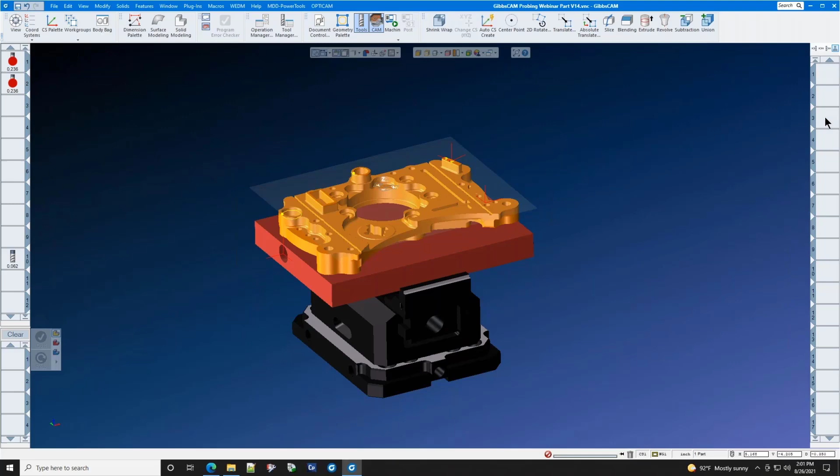In the previous webinar, we talked about why we probe. Today, we're going to get a little bit more in depth about how to probe.

In this webinar, we will highlight datum setting just prior to machining, in other words, using your probe as an automatic edge finder.

We will also talk about measuring your part and viewing the measurements in your machine, called critical part feature analysis. The data flows into a table on your machine where you can actually view the dimensions of your part.

We will show you how to update wear compensation values and work offsets to get your part to tighter tolerances, and with a little bit of macro work, you can create an inspection report after the completion of machining.

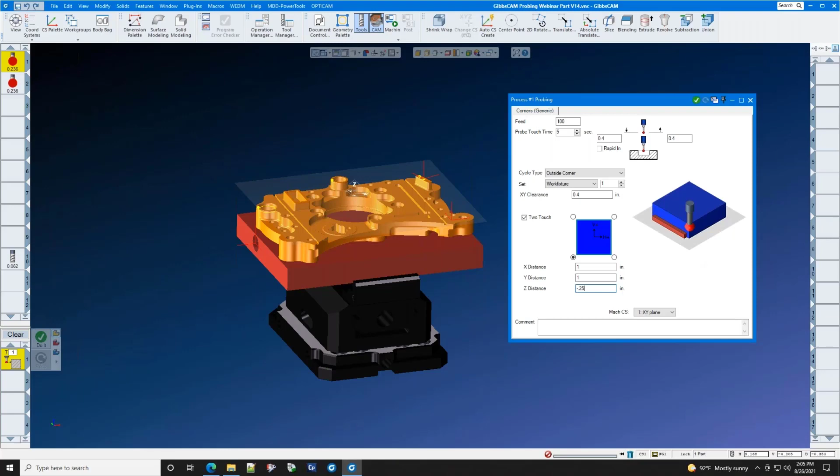Let's switch over to the GibbsCAM screen. I have a bunch of probing operations here, and we're going to clear them all out, and show you how we put a probing operation on a piece of stock.

Here we have a 5-axis vertical. Let's have a look at the machine real quick so we'll know what we're looking at. It is a Doosan DVF 5000.

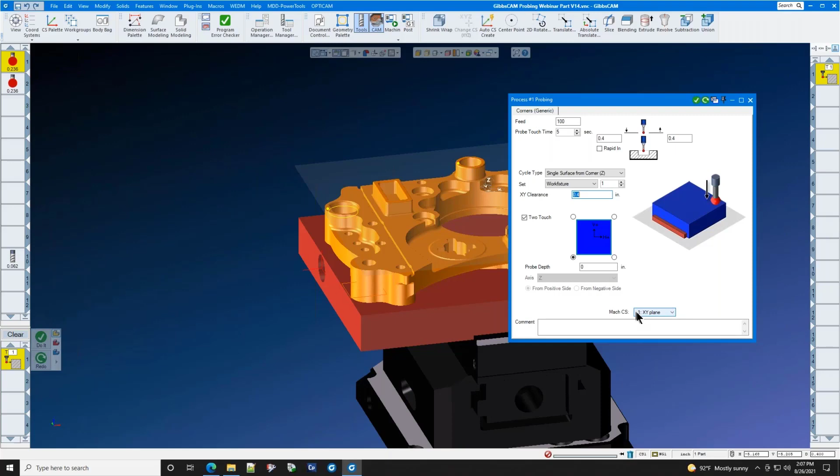There's the machine, the part sitting on the 5-axis table, and we will do some multi-axis probing today. But let's look at the part and the fixture, and we've already seen the stock.

We're going to show you how to probe the corners of the stock using your Renishaw probe and the Renishaw Inspection Plus software that's already embedded inside of your machine.

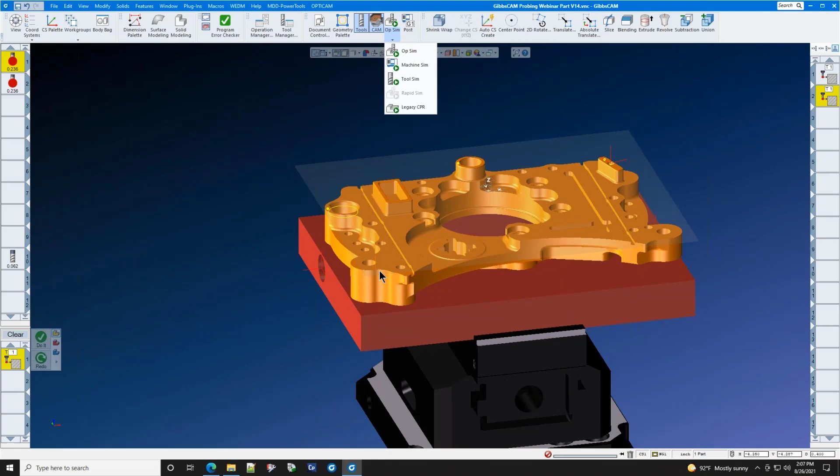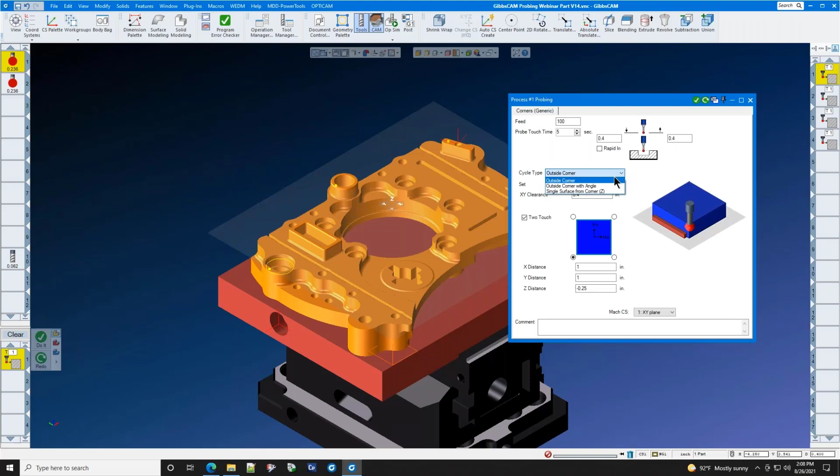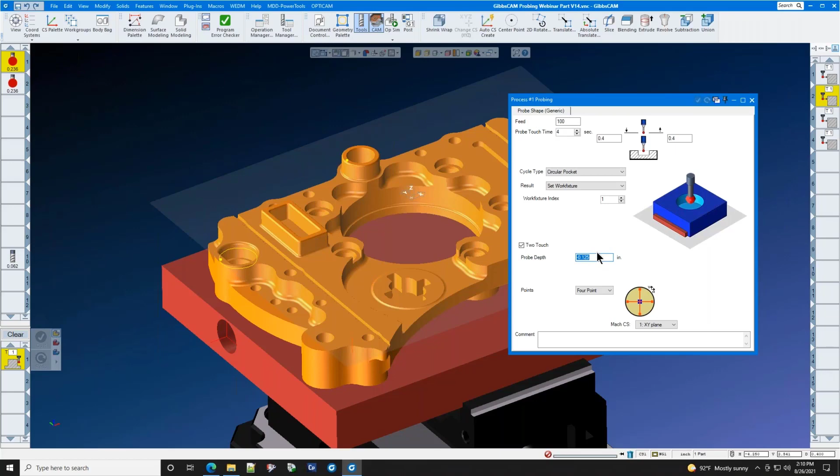We're going to clear the part by 0.4, and once we get inside of 0.4, we will go at a slower feed rate. Renishaw does that automatically. We're going to measure an outside corner, and we're going to set work fixture 1.

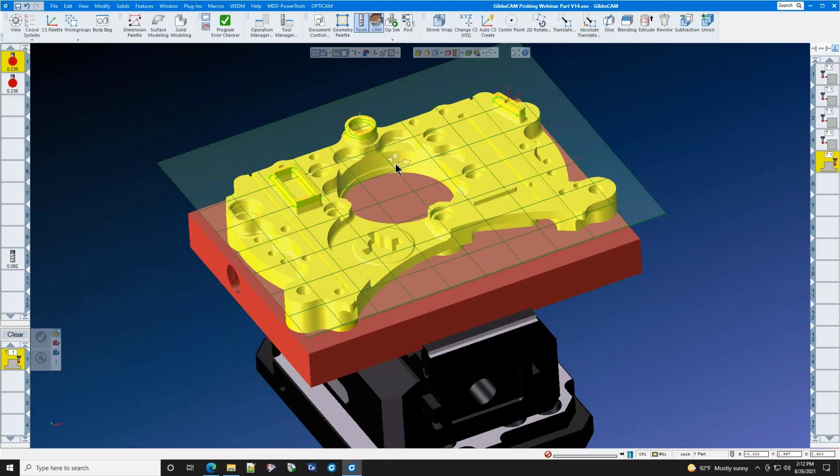Our XY clearance is 0.4, which is a short way of saying 10 millimeters. In your Renishaw Inspection Plus software, 10 millimeters is the standard offset distance.

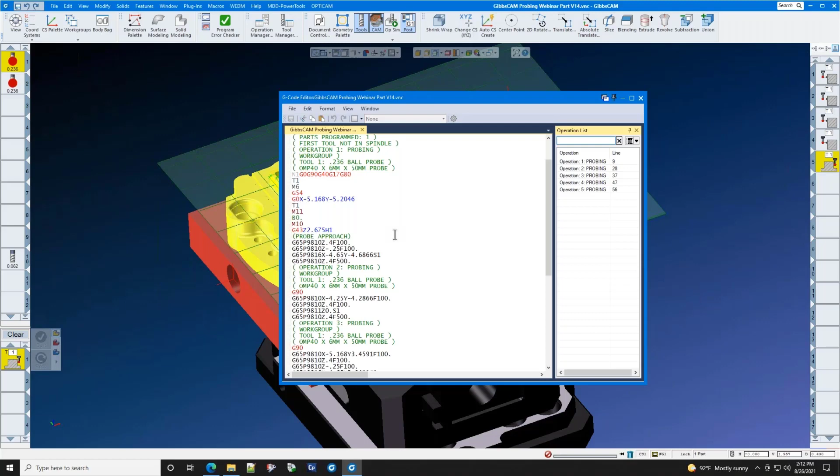I want to probe the lower left-hand corner with 2 touches. This 2-touch doesn't change what happens in your machine, but it does show a single touch or a 2-touch cycle here in GibbsCAM if you want to save time with single touch.

How far from the corner do I want to measure? My X distance of 1 and Y distance of 1. I will measure 1 inch up and 1 inch over.

And my Z distance is to the center of the ball. I'm going to make this minus 250 because the ball is 236, and I want to make sure that the ball gets below the outside of the stock.

When we click Do It, we get our first probing cycle. Let's look at it in Machine Sim and see what it looks like on the machine. Seeing it before you machine it is always the best way to review your CNC process.

We measured X and Y, and set X and Y in this coordinate system to that corner. Now we need to do the Z as well. Change from outside corner to single surface from corner Z.

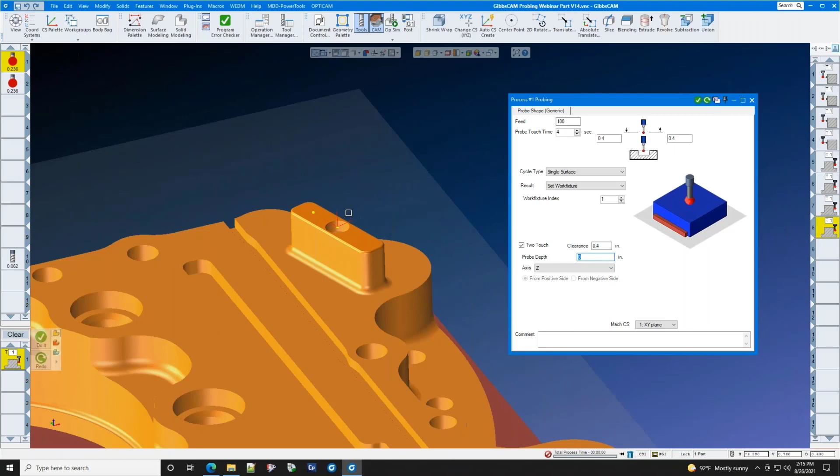The top of the stock is at 0. It's already been precision faced off, so we're going to set the probe depth at 0. When the probe touches the top of the stock, we want it to be set to 0.

This is a single surface corner, XY clearance 0.4, 2-touch, lower left corner, Z axis, and always from the positive side. It would be kind of difficult to probe this from the negative side. And of course, we're in the XY plane.

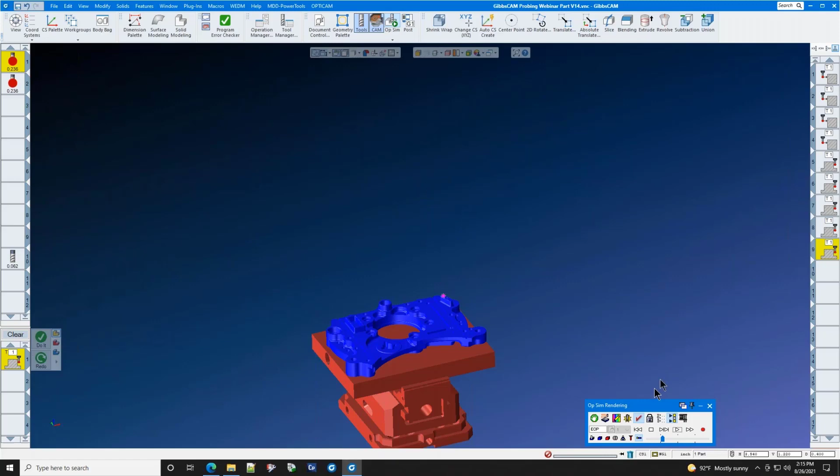When we click Do It, we now have 2 probing cycles. Let's watch both of them run, then change that to OpSim and rewind. You will see corner 2-touch, corner 2-touch, and top. We just set that corner to these coordinates.

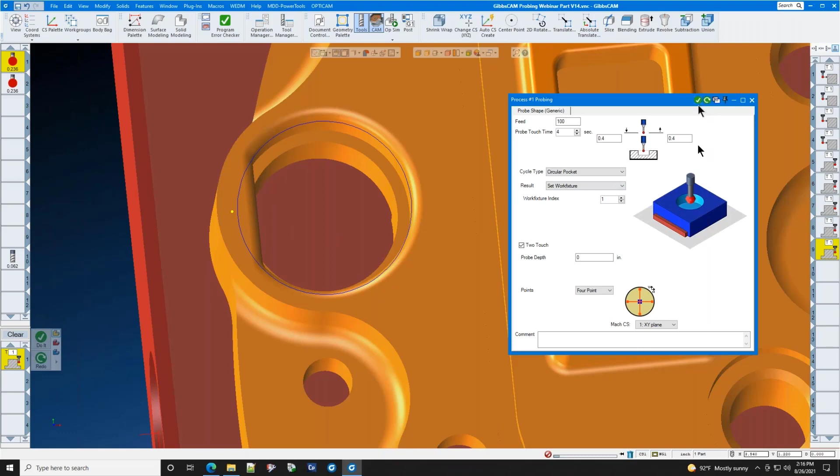You don't have to set your corner to 0. GibbsCAM and the Renishaw probe know that 0 is going to be over here, the distance from this corner. You can see the distance: X is minus 4.65 and Y is minus 4.6866. So don't worry about that—GibbsCAM and Renishaw will set your coordinate correctly.

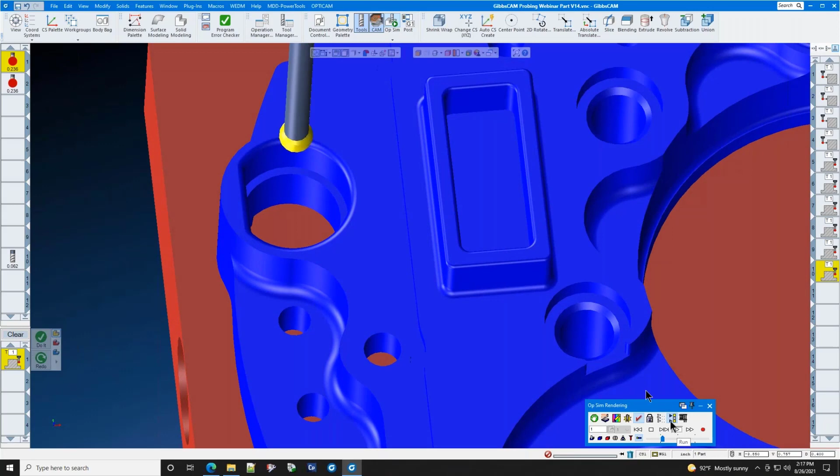You can duplicate this for each additional corner simply by opening the first op, changing to the upper left corner, and clicking Do It. You've got a probing cycle. Double click Op 2, change to the upper right corner, click Do It. You can do that all the way around the outside of the stock with very little effort.

The probe is a very accurate measuring device that most people only use as an edge finder. Here, we are teaching you how to use it as an edge finder. A little bit later in the webinar, we'll talk about measuring your parts and even updating the wear comp on your tools. Here, we're talking first about datum setting.

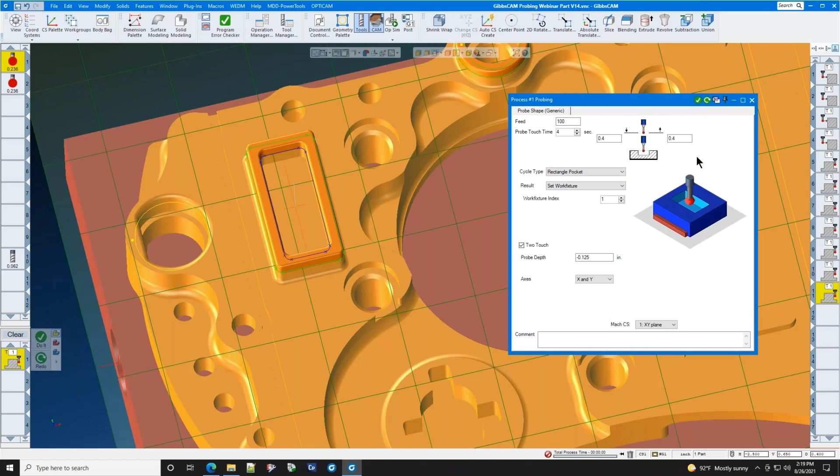Let's review: datum setting is with work fixture or work plane. We're using work fixture, and we're doing corners right now. We did the outside corner and we did the Z.

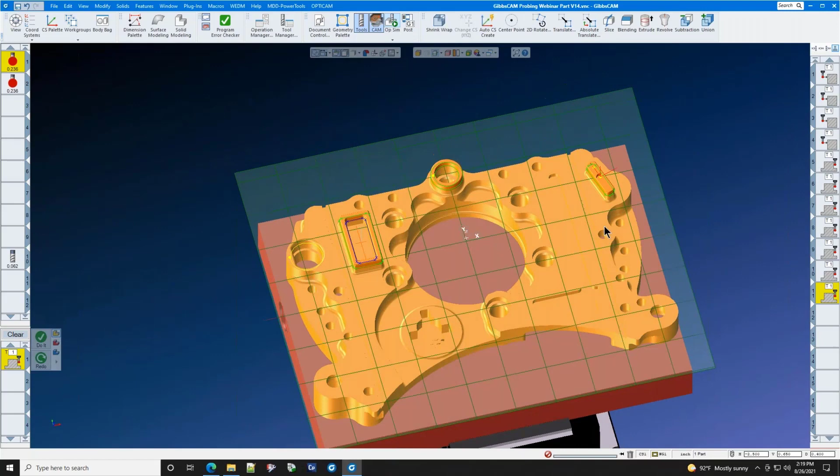Once you automate this, every time your operator puts a new part in the machine and closes the door, you have created a predictable, automated process that does not make mistakes.

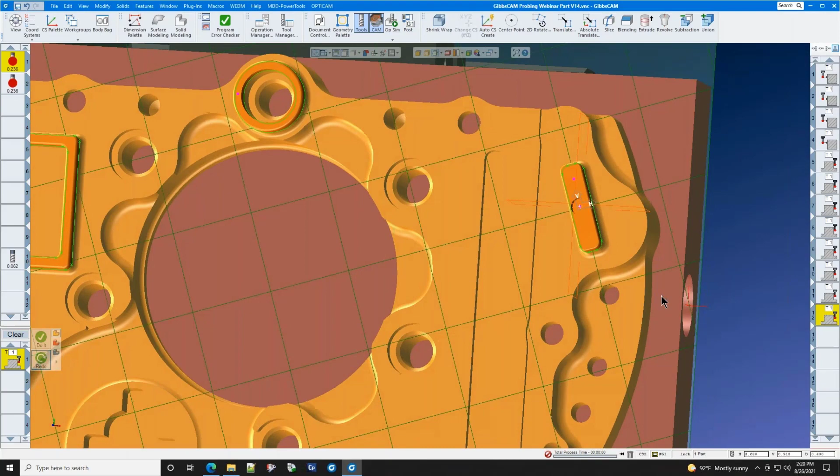Your probe's accuracy is 40 millionths of an inch if you have the standard probe. If you purchased the improved accuracy probe, which is a CMM quality probe, your accuracy is 10 millionths of an inch. So the probe is much more accurate than your machine.

Let's move ahead a little bit and talk about probing other types of features. Remember, this webinar leans more towards how do I probe rather than why do I probe. The first thing I'd like to look at is let's measure this bore and this boss right here.

And we're going to use that feature to set our 0. Bring the probe down. Select—now, instead of corners, we will select shapes.

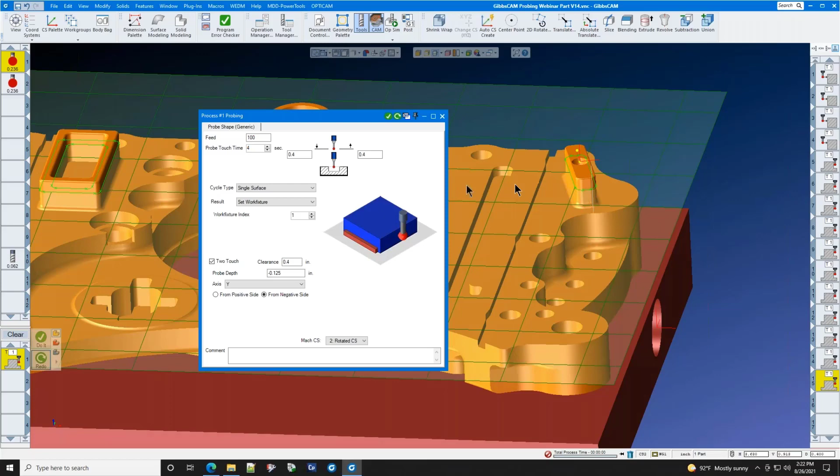We will set our feed rate at whatever your machine can tolerate or whatever your machine is programmed at from Renishaw. I'll put 4 seconds in here for cycle time, the standard Renishaw standoff distance of 0.4 and 0.4. And let's do circular pocket first.

Do we want to set work fixture or measure? We want to set work fixture, and let's set work fixture 1. 2-touch. Probe depth—I want it to go just inside of this bore. 0.118 would be the center of the ball, so we set minus 0.125, and this will be a 4-point measure.

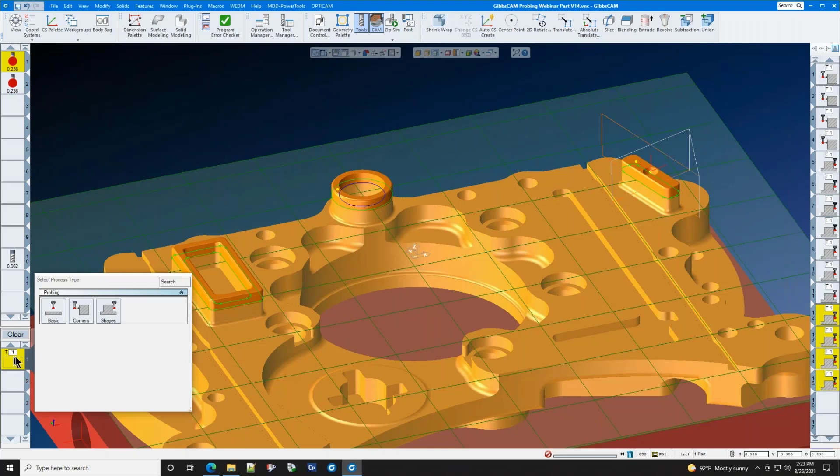Turn on your profiler because you do not need to extract or create any geometry, and click the Do It button. We now have a probing cycle inside of that bore with just a few clicks. Let's have a look at that cycle by itself, but first we need to set the part to stock. Click on the part, right click, body type is stock.

Now when we go back to OpSim and press rewind, we will see the part. Let's select here, skip unselected ops, that way we don't have to watch the corners. Let's probe the bore: 1, 2, 3, 4.

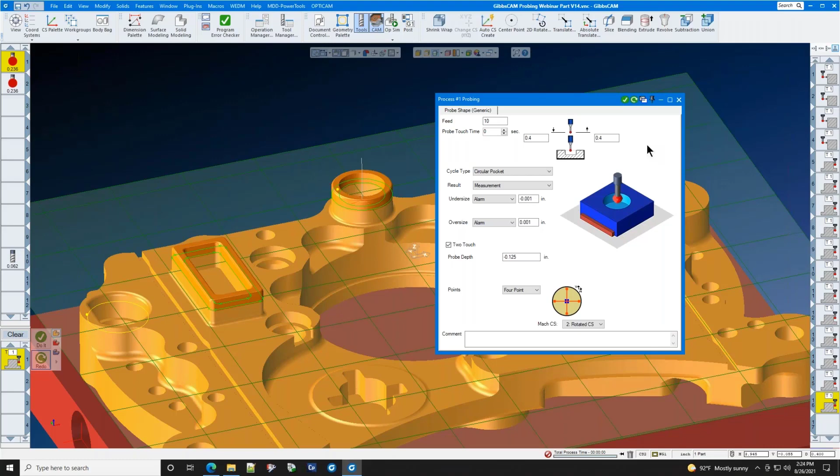It just probed that bore very quickly, and it output the dimensions of that bore to your offset table, which means this is going to be the center of your part. The probe and the GibbsCAM software, all of this happens automatically.

Here we have a probing post, and we're going to output the code to this folder and click Process. Here you will see very neat, very clean Renishaw code. If you've written any of this by hand, you'll recognize it, and it's very easy to understand, especially when you have your Renishaw Inspection Plus manual in front of you.

There we have a little bit of code, and we measured that bore. Let's change up and measure the boss now. Double click the process, we can simply reuse it. It has almost everything we want, except we'll change this from circular pocket to circular boss.

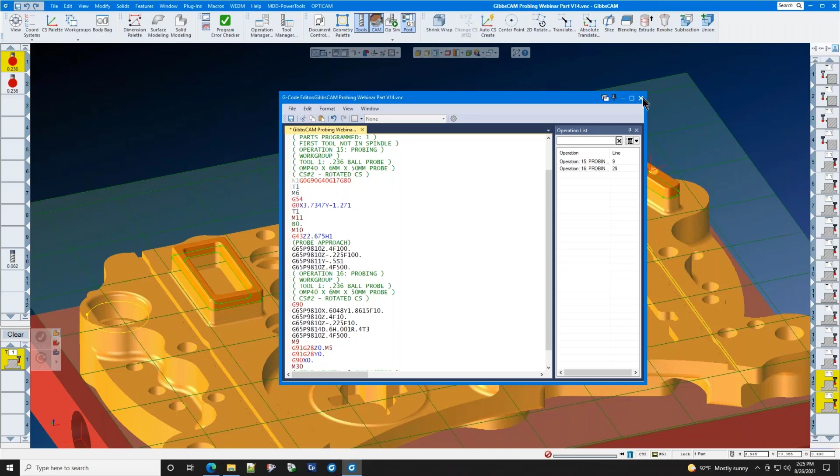Select the outside boss geometry and click Do It. Again, we have a cycle that looks very different from the circular pocket cycle. It knows to step up and over the boss when it's doing the measuring process.

Notice that while GibbsCAM is measuring your part, it puts a little star on the part to show you where the probe touched. Again, we have just set the work fixture offset using that feature. That feature may have been pre-machined, and then we want to accurately set its distance to the center of the part. Now that we've looked at circular pocket and circular boss, let's look at single surface.

In single surface, the only geometry you need is a point. We have a point here, we have a point here, and we have a point here. The interesting thing about these points is when we go to single surface and we have our probe depth for Z, we're going to single surface, axis is Z from positive side.

What is our probe depth? Well, we're not quite sure. We can alt-click on that point and GibbsCAM automatically puts the number here. We click, check our parameters, and do it.

And we now have a Z probe, a single surface probe, right on the edge of that D hole. And we're going to come back and measure that D hole in a little bit, because we all know the challenges of a hole that is shaped like a D.

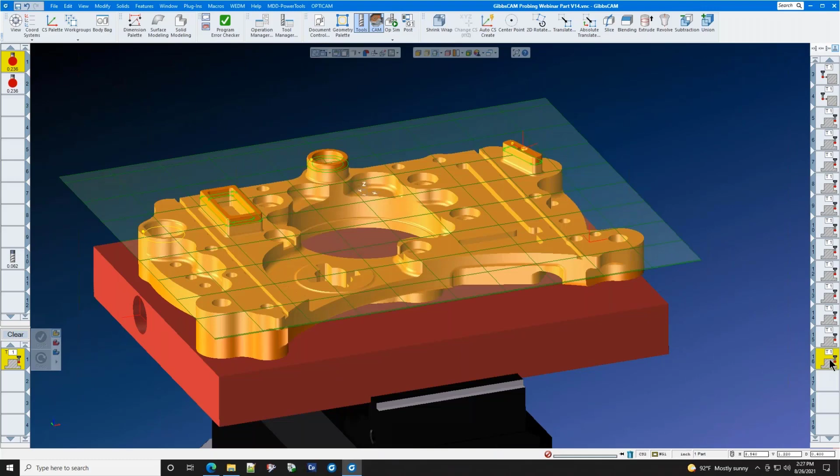It's very easy to create probing code, and the code doesn't need to be tested out at the machine. The code is tested right here in a virtual environment, and you can be assured that when you go out to your machine everything is going to work correctly. You have visual verification that your probe is doing what you want it to do.

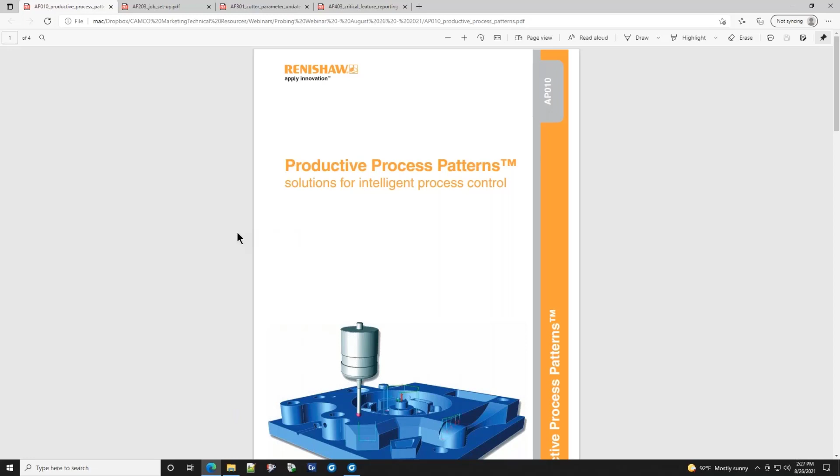Speaking of which, the new probes are much smarter than the old probes. When GibbsCAM puts your probe in the spindle, the software checks the battery condition of the probe. It makes sure that the probe is hot and running, and that the skip signal is hot and running in your machine. It ensures you that your machine will be ready to probe if you don't get any alarms at the beginning.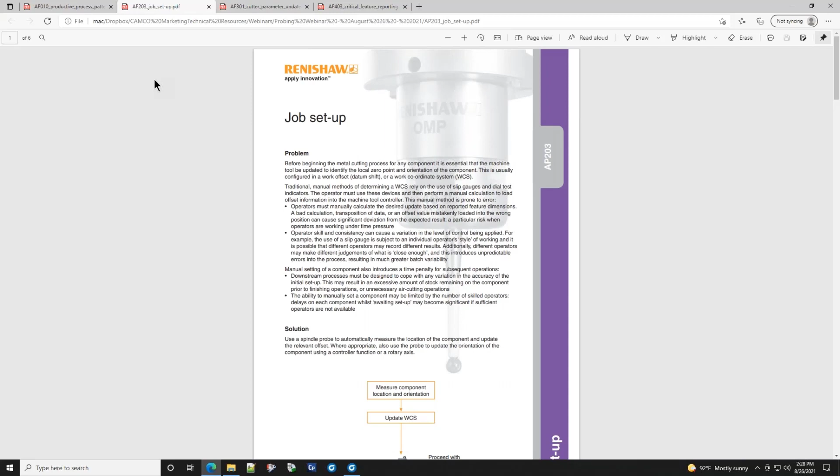Let's make that depth a little bit better. We got minus 375, and we'll make that minus another 125, and redo. But when we get to that point, that's going to make a horrible mess.

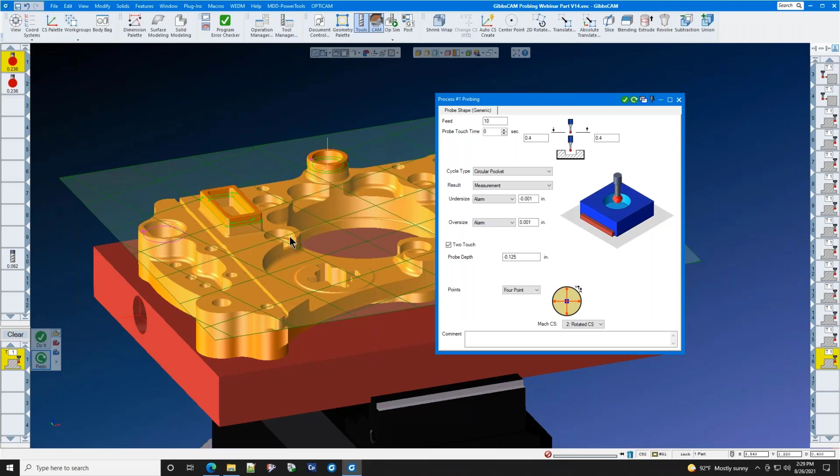In GibbsCAM, watch what it shows you. When we go to measure the part with that D hole and the cycle is incorrect, let's click skip unselected ops. Oh, it went all the way into the material. Not good. We get to see that. What can we do about this little situation?

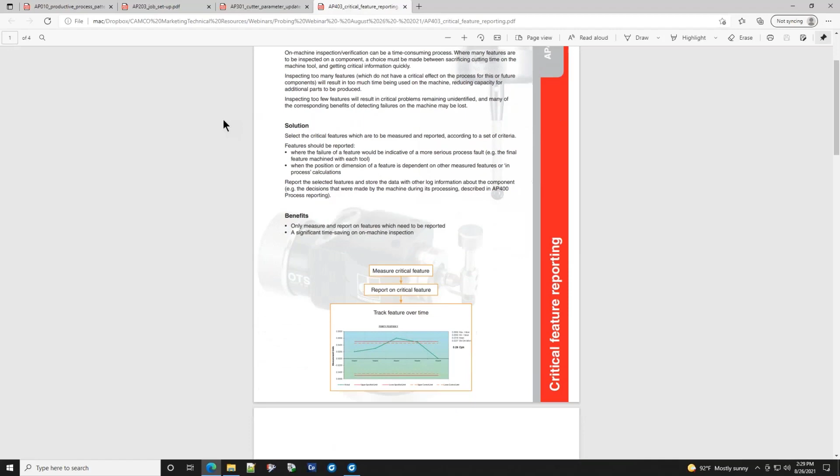Let's change to 3-point and set our angles to 0, 120, and 240, and click redo. Now we have avoided that D feature. Let's have a look at the cycle again, rewind and play. And the probe now very deftly avoids the D feature.

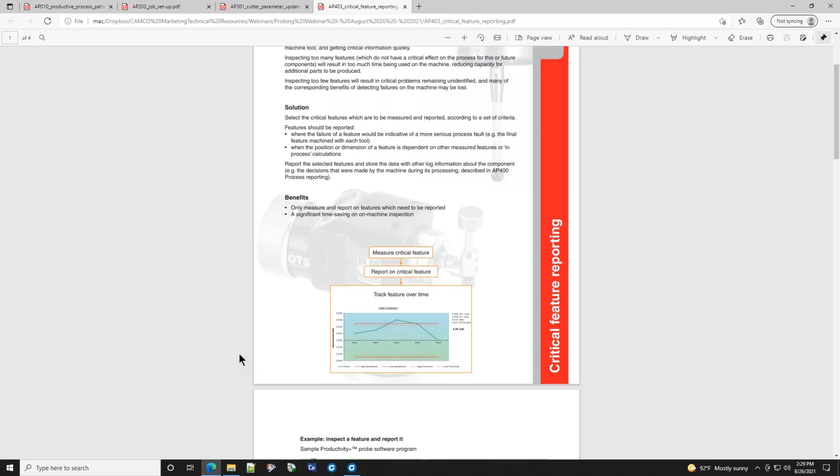You can rotate your circle to any degree by using these 3 points. The only rule you must abide by is the same rule you have in your CMM lab: the circle you measure here must have at least 185 degrees of included angle. If you don't have that much angle, your probing application will not be correct. We know this from practice with all types of probes and probing systems. We need to pass that second quadrant.

Now let's look at rectangular features. We have a rectangular boss and a rectangular pocket. Let's change cycle type to rectangular pocket.

Probe depth, let's find out the roof of this. It's at 0. We'll make the probe depth minus 0.125. And we get to select X and Y, X only, or Y only. Let's do X and Y and do it.

Whoops, I didn't click on the geometry. Turn on the profiler, click on the profile geometry, and redo. So I clicked the wrong geometry, and it will show me when I run the cycle that it will run clear through the material. We simply need to click the inside geometry and redo. GibbsCAM will show you when you've made a mistake.

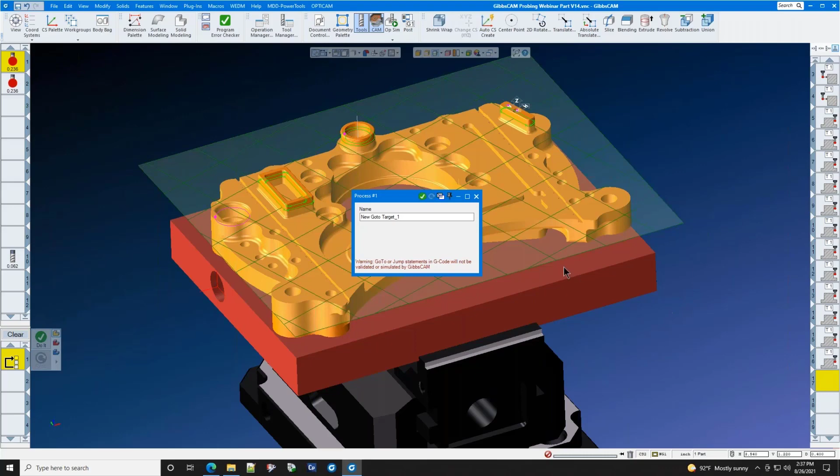In cut, measure, cut technology, if your machine has a total tolerance capability of 0.0004 of an inch, then the Renishaw probe will help you get to that 0.0004 of an inch without opening the door, climbing in the machine, measuring the part, coming back out, going to the wear comp table, adding the numbers in.

We have interrupted the program by stopping and having someone measure. By using GibbsCAM to automate your probing, all of this happens automatically and reliably and without detriment to your cycle. Your cycle becomes much more predictable. The machine heating and cooling becomes much more predictable on very tight tolerance parts.

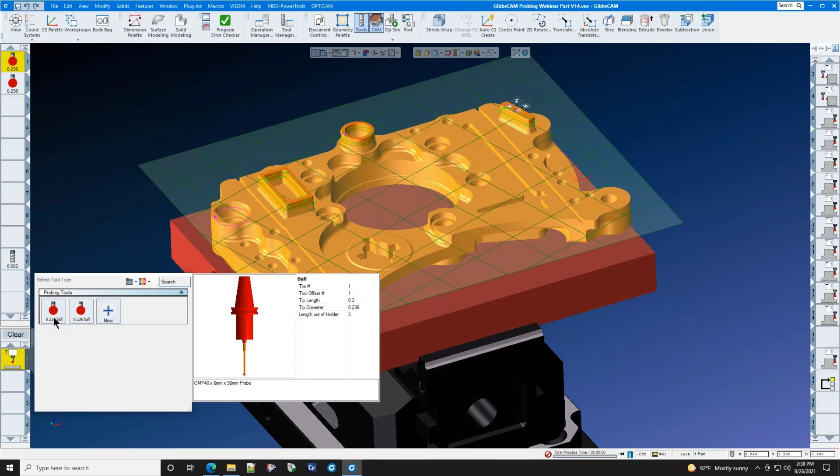We've looked at measuring the part in a number of different ways. Let's see what other options that we have here under measurement. We can alarm if it's oversized, but let's say the bore is undersized and we don't want an undersized alarm.

We just say continue, because if a bore is undersized, that means that it is in a metal on condition and we can continue machining. Only if the bore is oversized would we have a problem. Now, a boss is exactly the opposite. We would leave its alarm for undersize and continue for oversize.

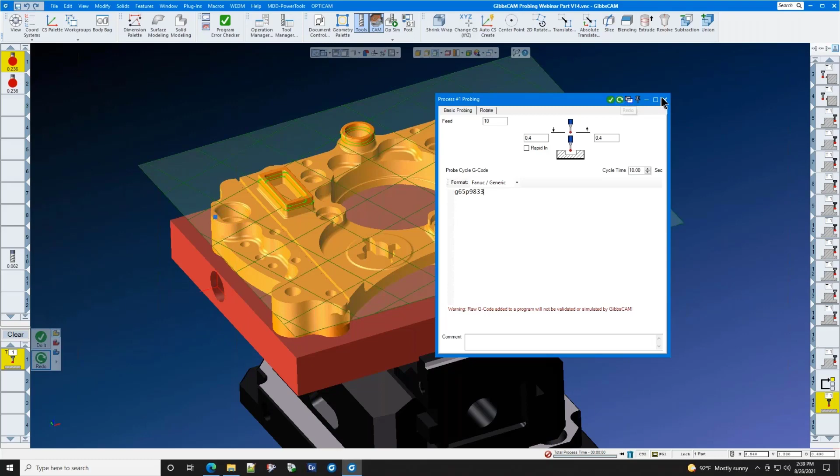All of these little tricks help you create a more accurate, more reliable program. It helps you slash setup time. It helps you reduce your lead time, reduce your process variability, reduce scrap and concessions to your customers, and make your process more predictable.

You can measure your parts after you're done, and when you output that measurement, where does the measurement go? If you look in the programming manual of your machine, you will see where the outputs go. On a Haas, the diameter would go to parameter 138.

There are a number of handouts that we have for you in the downloads area, and those are things that we have just talked about, things that we do just before cutting, things that we do during cutting, and things that we do after cutting. You can simply click on those links to download those documents.

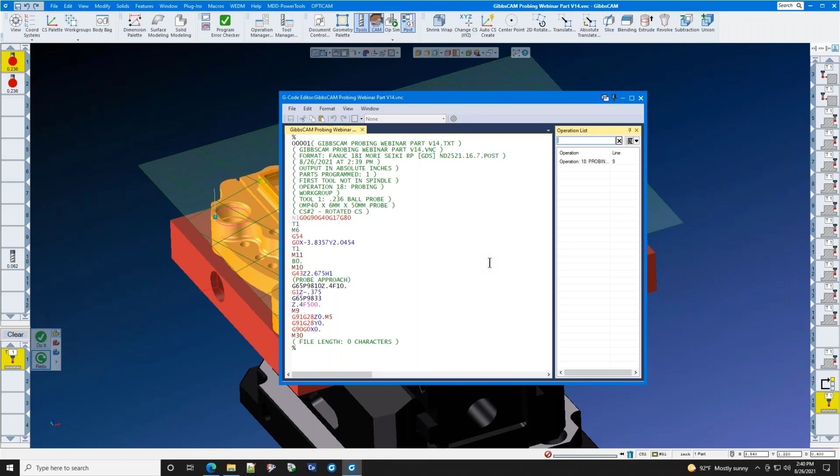These documents give you a problem, they give you the solution, and they tell you what the benefit is of using the probe in an automated fashion inside of your machine. Each of these documents also includes a case study and shows you what the code is going to look like when it comes out to your machine.

This is Step Application Protocol 203. You've seen this many times when you import a solid model. Step AP 203 simply means datum setting.

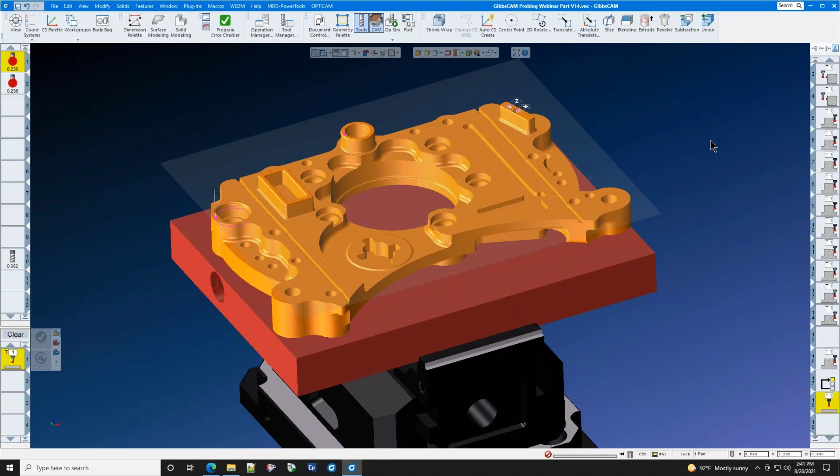Step AP 301, cutter parameter update. Remember, we showed you that adding a T3 to the end of that probing line will automatically update the wear comp of your tool. It gets even smarter than that, because the wear comp for a Z feature is different from the wear comp for an XY feature, but the software automatically knows that information.

The last thing we have here is another document called critical feature reporting. You want to be able to look at the dimensions of your part and alarm your operator if the dimensions exceed a lower tolerance band or a fail band. You have a lower tolerance band and an upper tolerance band—the warning is yellow, and red is a failure. The machine will stop automatically when you get to the failure.

We hope that you have enjoyed the how-to section of this probing exercise. We're now going to switch over to Mr. Bart Ehlers, and he's going to take any questions that you might have.

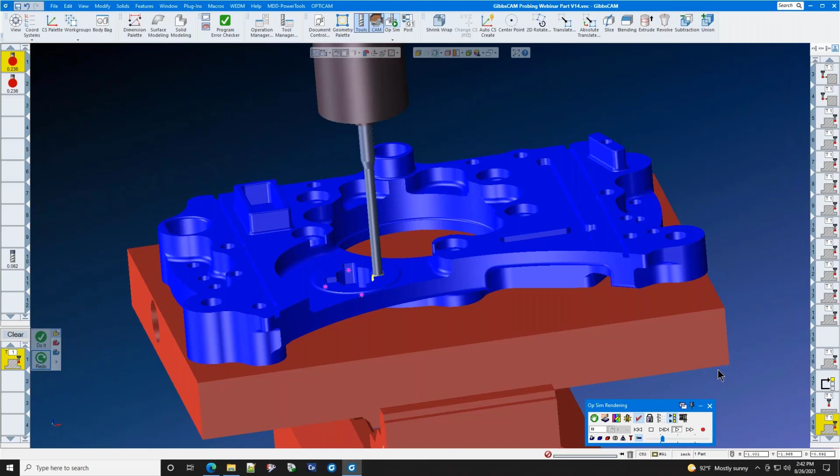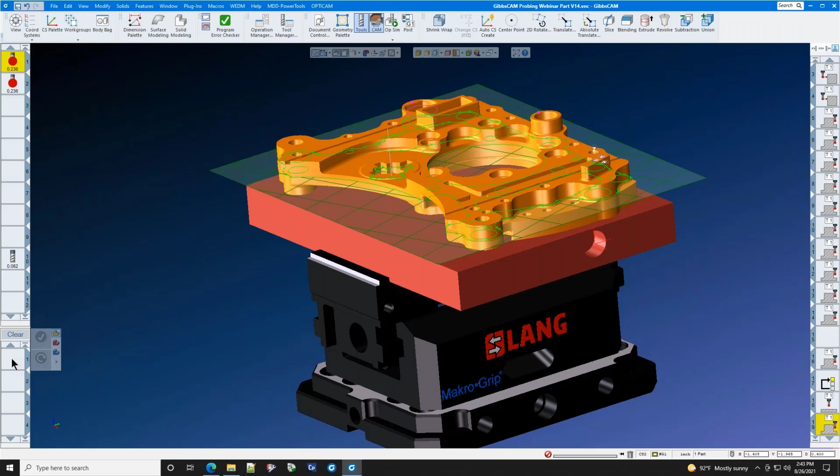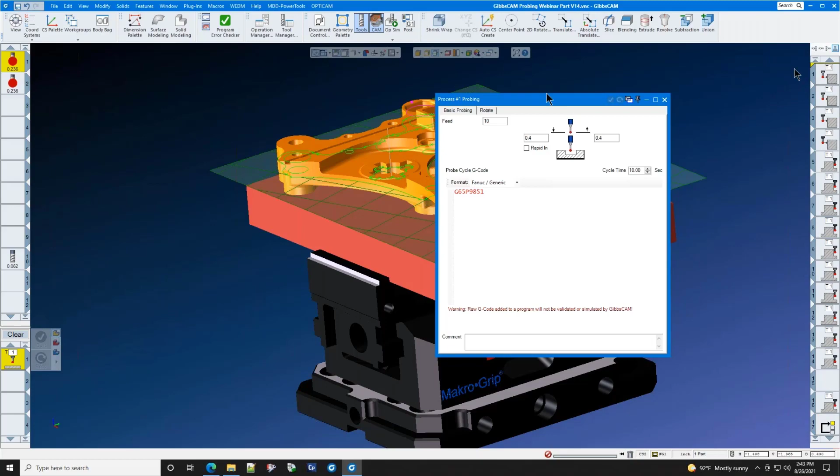Can GibbsCAM probing adjust the tool wear compensation on my machine? Yes, it can do tool wear compensation on your machine, if you have a Siemens control, a FANUC control, and when I say FANUC, we mean FANUC clones as well—things like Mazak, the Mori Seiki MSX, the Mitsubishi 700 series, and other FANUC clones out there, including the Makino Pro series. They all use almost identical software. And yes, that wear compensation can be automatically added to the cycle, and it runs each time you run a new part.

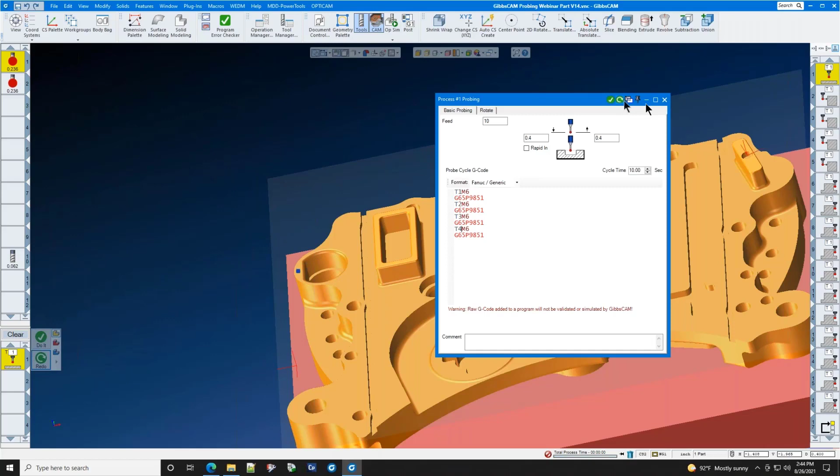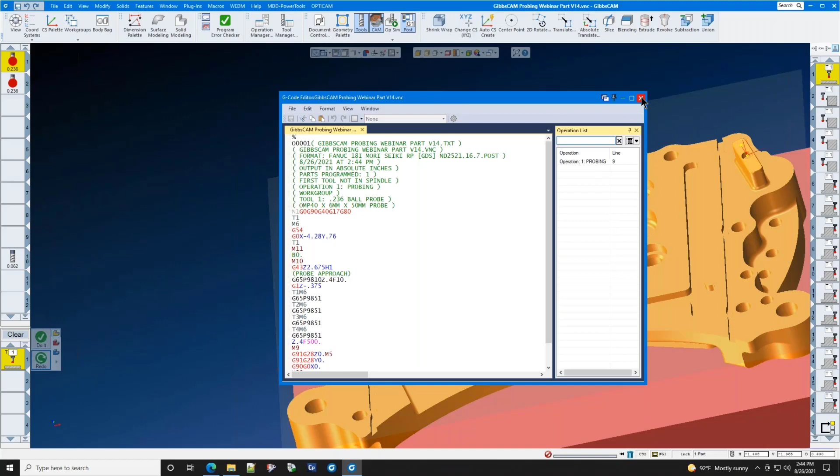Another question from our audience: is it possible to probe non-prismatic surfaces? With the standard switch probe, the answer is yes, but with greatly reduced accuracy. If you want to probe non-prismatic parts, you will need to step your probe up from the OMP 40 or OMP 60—that's a 40 millimeter head probe and a 60 millimeter head probe—to the OMP 400 probe or the OMP 600 probe. Those are actual strain gauge probes, Renishaw CMM quality probes. They not only sense direction much better than a standard probe, they are four times more accurate. So if you want to do non-prismatic probing, you'll need to step up to the more accurate probe.

Another one: when probing on a part and running machine sim, if the codes are wrong, it's not alarming out with any messages. Will it alarm out with an actual message? On the machine, yes.

Here's what happens. If the operator loads the part incorrectly—let's talk about that in a few ways. If he loads it too far to the left and the probe comes down, it will approach the part, and because the top of the part is now where it was not supposed to be, it will feed down, and when it touches the top of that part, it knows the top is not supposed to be there. It will alarm out and say path obstructed.

On the other side, if the operator loads the part too far to the right—say a half an inch or a quarter inch too far—Renishaw and GibbsCAM will search for the part within a certain range. If they don't find the part within that range, it will also alarm and say probe is open, meaning the probe didn't find anything. That's a signal for the operator to stop, go in, push the part up against the stop, and restart the program. So yes, if the probe runs into anything that's not supposed to be there, it will alarm and say path obstruction. If the probe goes to find something that's supposed to be there and it doesn't, it will alarm out and say probe is open. So you have both found and not found conditions where you will get an alarm.